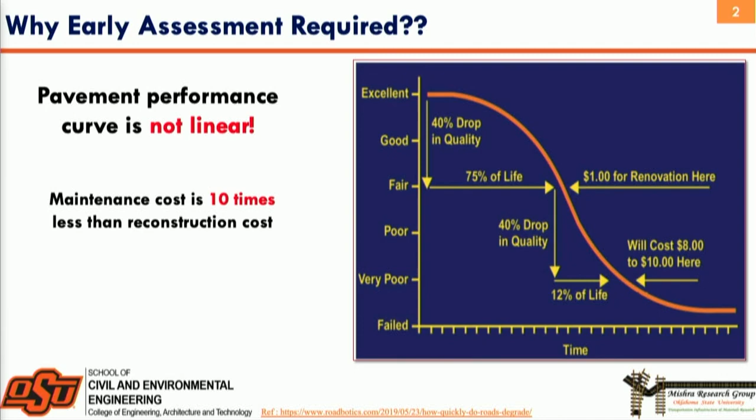As time goes, the performance curve actually is not linear, it changes. And at what point you actually address it and at what point you fix the thing really determines whether you are doing something that's cost effective or not, all right? And when you do maintenance in time, you can actually save up to 10 times of the cost. This is all based on literature.

So whenever we have our pavement network maintenance, all DOTs have these pavement survey vans. Either they own it or they contract it out to some kind of consulting company, and then they go around and take the survey of the pavement in terms of its cracking, its roughness, its rutting and everything. And for those of you who don't know, at OSU, Dr. Kelvin Wang and Dr. Josh Li are basically world leaders in this area. They do a lot of really cool work. Both of them are here as well.

But what traditionally has been missing in the maintenance decisions for DOTs is the structural condition of the pavement. So essentially, yes, the surface is cracking, but is that because there is a bad asphalt mix? Is something wrong with the surface layer? Or is it something deeper? Is the base layer defective? Is the subgrade defective? How can we find the actual cause and try to address that in our maintenance and rehabilitation without going with a one solution fits all kind of an approach, right?

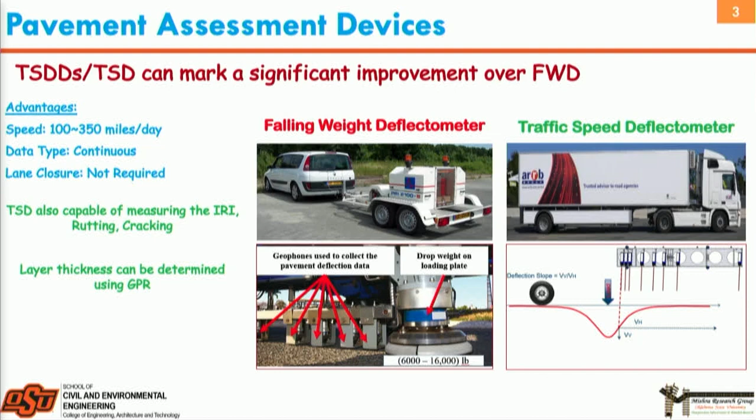That's basically the figure on the top right. Okay, so that's what this talk is about and what those devices can do.

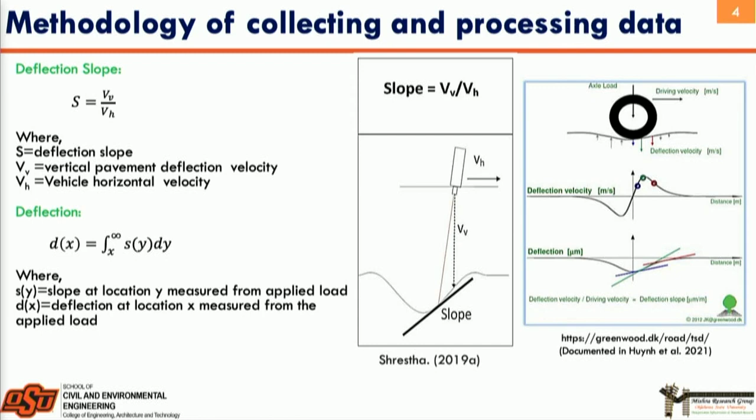Okay, so if you go into theory, and we are not going to go into theory, the TSD that is operational in the US right now is actually manufactured by Greenwood Engineering out of Denmark, and then ARRB actually runs that. It's called the TSD, or iPave is the name, but essentially it is based on the concept of Doppler lasers. These lasers shoot on the pavement, and as the vehicle is moving, they measure the velocity of the pavement surface, and then you can do all sorts of mathematics to it to get pavement deflection. Okay, we're not going to go into any of that detail right now.

So when the TSD came, there was some talk about whether it is a good enough indicator, right? Is it doing as good a job as the FWD, or the falling weight deflectometer, which has been the gold standard for several years? And the joke around that is that when the falling weight deflectometer started several decades back, the first thing tested was whether it did the job an actual truck is doing. So back then we spent a lot of time checking if the FWD is doing what a real truck is doing, and now we have a real truck, and we are trying to compare if that real truck is doing what an FWD is doing. That's how practice is, that's how things go.

That's okay. But anyway, a lot of work has been done to compare whether the deflections from the TSD are comparable and give good enough data as an FWD. So these are some plots from literature. This is some of my work. By the way, before I joined here, I was at Boise State in Idaho for 5 years, and for the Idaho Transportation Department we did some work in this field. So this is work from there.

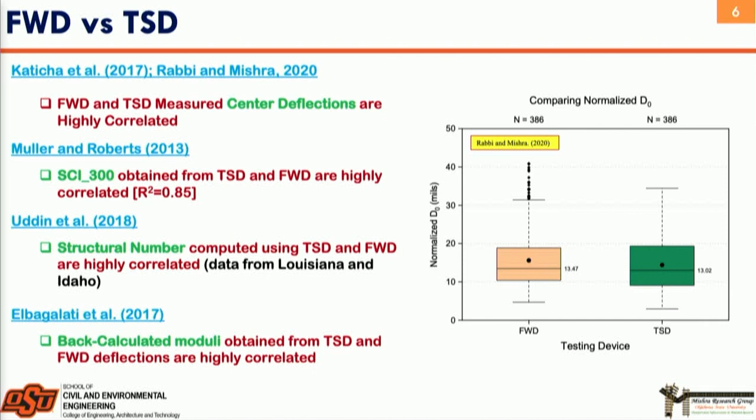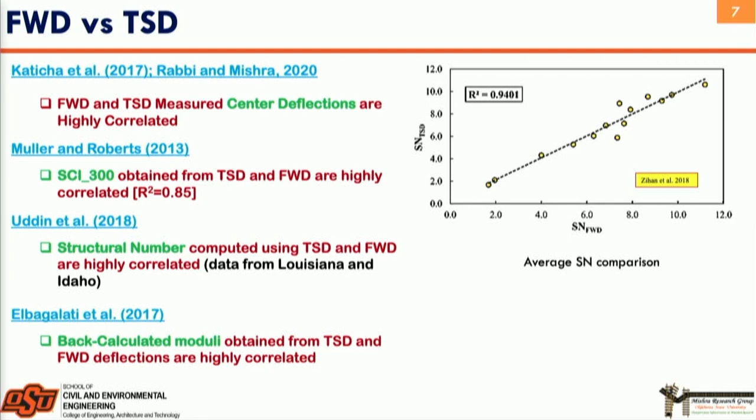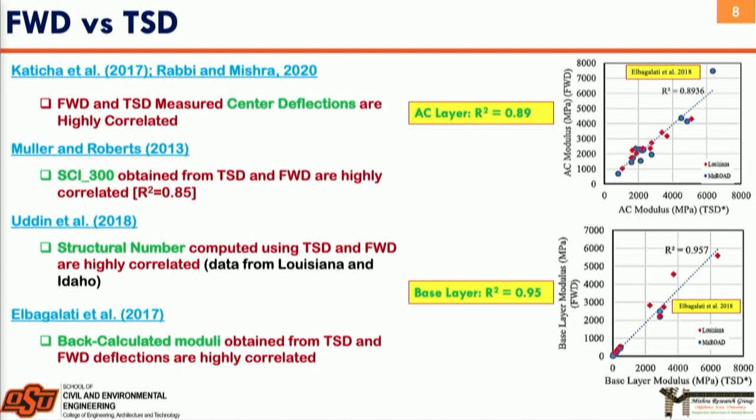If you look at the box plots, for the FWD the median value was about 13.47, and for the TSD it is about 13.02. So we can all agree they're comparable. Then there is structural number; the pavement folks will identify what it is. Yes, it is AASHTO 1993, not what Pavement ME or the modern method uses. But you can compare the back-calculated or remaining life structural number, and they're also comparable. And there is another one on modulus calculation as well. So essentially, all these graphs establish that the TSD gives data that is good enough and reliable enough for our usage.

Okay, so now let's move on. Why should we consider structural condition during network level pavement monitoring? What's the need for it? I should not say all, because several DOTs are now moving in this direction, but previously everything was based on functional condition, like cracking, rutting, IRI, roughness, and then you have the prioritization programs. But wouldn't we be more informed if we actually checked the structural condition of the pavement?

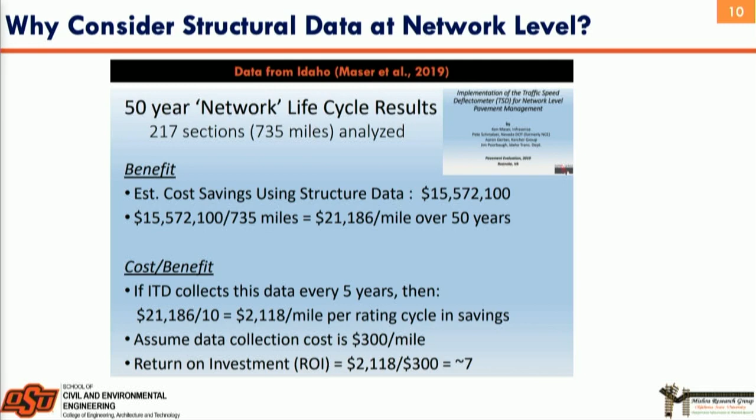And there are DOTs talking about their decision matrix and saying they will incorporate structural evaluation data into it and be more informed, rather than maybe doing a full depth repair or reclamation where the problem was only superficial. Imagine the amount of money we're going to save. In fact, one DOT engineer keeps saying that if we collect data every year and find one project where the decision would have been wrong compared to using continuous deflection data, then we would have already recovered the cost of testing many times. So that's essentially the reason for doing this work.

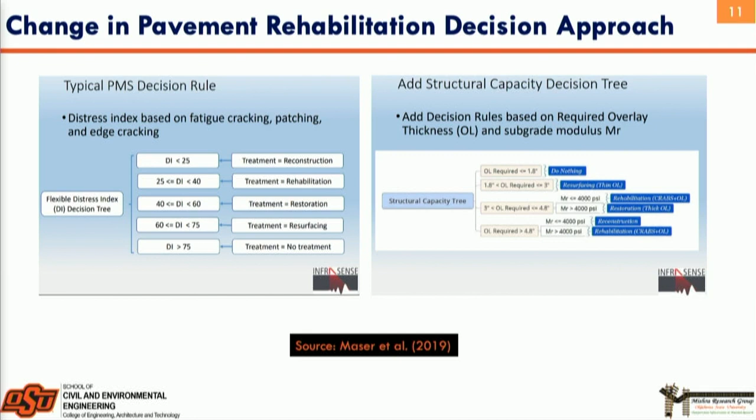Okay, so there is a pooled fund study going on by the FHWA where, per last count, I think 26 states are participating.

Virginia Tech, or VTRC, is actually the lead for that, and ARRB is the primary consultant collecting all the data, and Oklahoma DOT is actually a part of that study. So what happens is that every DOT puts in a certain amount of money every year and then works with ARRB to collect data. Now, how they are implementing it into their pavement management system, their decision matrix, what they are using, that all changes from state to state.

But again, states are jumping into collecting this data, and ODOT jumped into collecting this data. In 2019, there was data collected. In 2020, data was collected. And in 2021, there was also money, but I don't think it's going to be collected this year. It's going to be collected next year.

So at OSU, we got a task order with ODOT, thanks to Angel Gonzalez. I don't know if Angel is here or not. I don't see him. But he was the technical supervisor for this one.

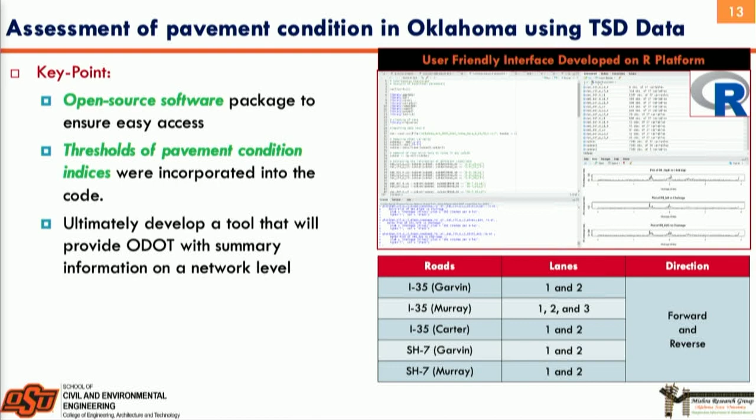So we actually took the data, and we worked towards developing a tool that we are going to hand over to ODOT, and then ODOT will be able to import any TSD data or continuous deflection data, and they can do all the analysis themselves and come up with decisions. We are doing this on the platform of R, which is open source, so that we can just give it, and any engineer at a district level can also do this.

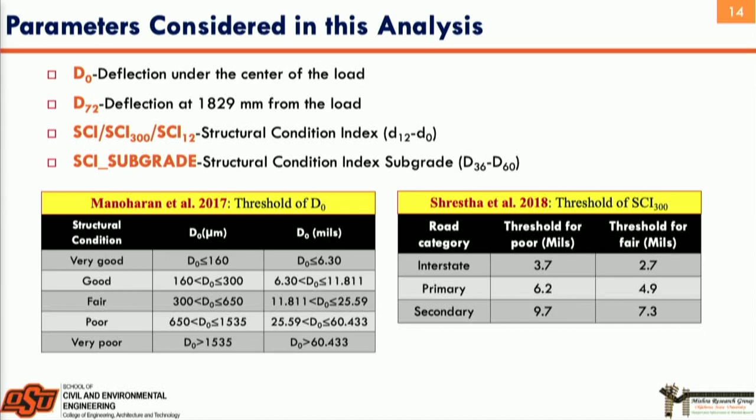Okay, so we've been working on this. We have different metrics to decide which road is good and which road is bad. I'm not going to go into the details, but essentially you can find out where the soft spots are in that roadway, if there is a problem in the surface layer, the intermediate layer, the subgrade layer, or the overall structure.

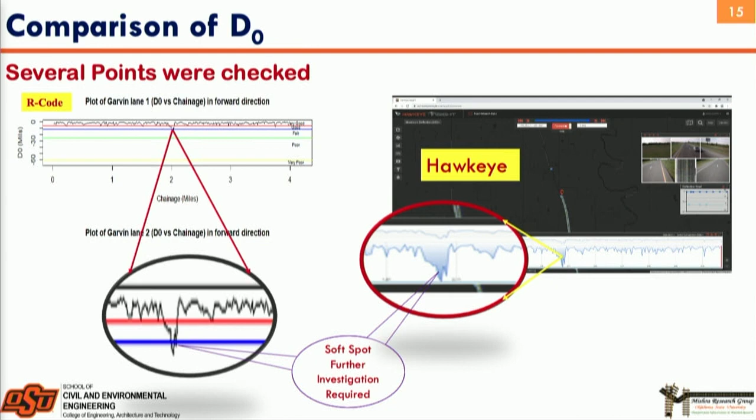If you incorporate GPR, or ground penetrating radar, which this data does not, then we have the layer thicknesses as well. So you can do all sorts of things. You can back-calculate moduli, you can design rehabilitation methods and stuff like that. And you can do a lot of visualization on different structural indices. I'm not going to go into this because this is more of an overview presentation, but you can see whether the subgrade and the surface are correlating well, whether they're in similar structural condition, or the surface is in good condition and the subgrade is in bad condition, and all sorts of combinations.

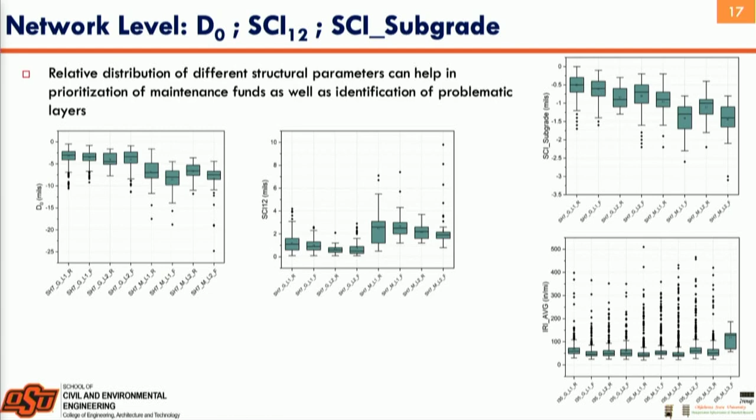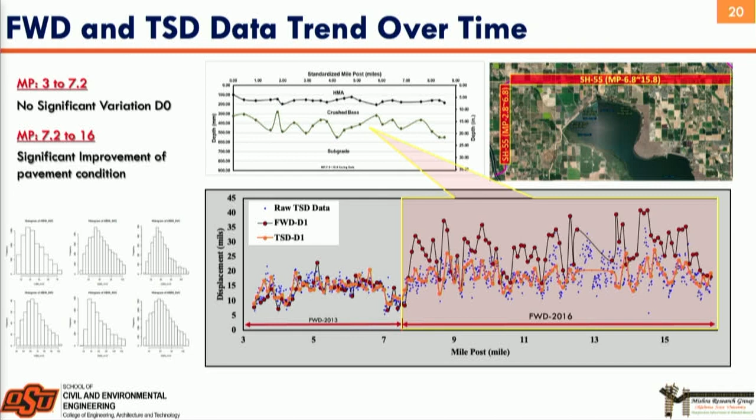Okay, so this is a couple of things from Idaho that we did. We did a lot of network level work there, compared the FWD to TSD, and found a really good match. There is some work involved. The data needs to be aligned properly. It needs to be understood properly. You need to have some idea about the layer thicknesses if you are doing back-calculation, but it is doable.

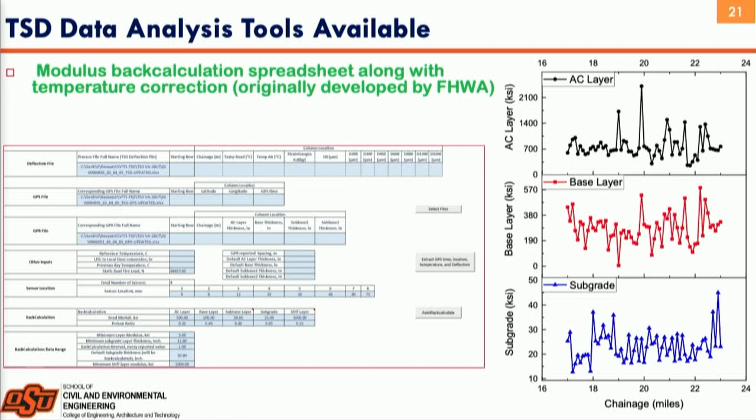FHWA actually developed a spreadsheet program for back-calculating individual layer moduli, and we were able to get that. We modified it a little bit. So now, for any ODOT roadway or any district, if we have the layer thicknesses and the TSD just drives over it, we can back-calculate and propose overlay designs and everything. So all of that is currently available.

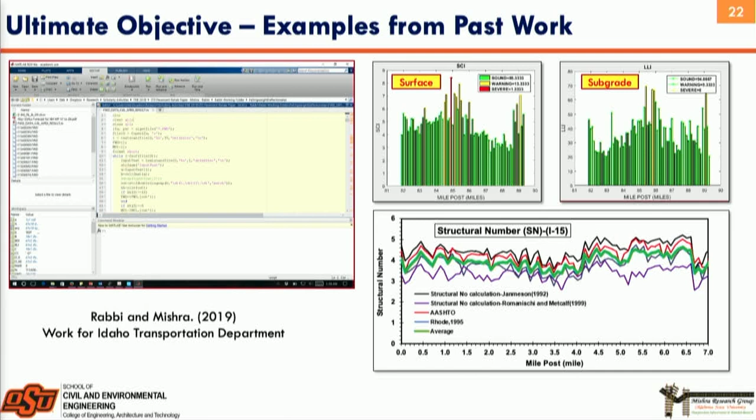Okay, I'm just going to show a couple of snapshots, and then that's the end of my presentation. Here is a tool we developed. There are two screens you'll see. This is a MATLAB-based program, and the next one is an Excel-based tool my research team developed for Idaho, and we handed them over. We said if you just give us the layer thicknesses, the FWD data, because that work was FWD, and whatever miles you have,

we will give you a frequency distribution of what portion of your road is in good condition, what portion may need maintenance in the next few years, or what portion needs immediate action, and for those portions, what is the problematic layer? Is it the surface, the base, or the subgrade, and what is the likely rehabilitation method.

We had a meeting with ODOT a couple of weeks back, and the whole idea is if ODOT continues to collect this data, and if we are able to work with ODOT on this, we will be able to do this at the level of continuous or traffic speed deflection. So no traffic control is needed, and we have continuous data. So not only can network level decisions be better, but this data can even be used for project level decision making and overlay designs. So there is a lot of potential in this data. This is a great pooled fund study that ODOT is a part of.

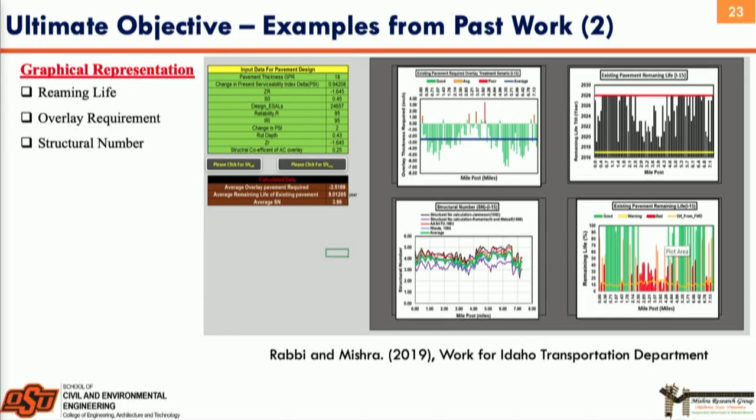In summary, that's essentially what we're doing. This is my research group at OSU.